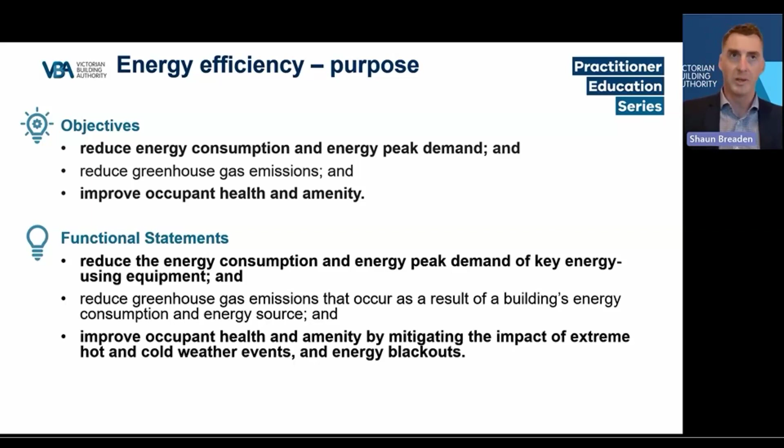Yes, these are not mandatory, so they're the non-mandatory part of the code, but it does give you a really good sense as to why the subject matter is important and why we're here discussing it today.

So if we look at NCC compliance, we've got the fundamental clause that tells you what NCC compliance actually is. A2G1, I like to call it my favourite clause in the NCC, says compliance with the NCC is achieved if you satisfy the governing requirements as well as the performance requirements.

In terms of energy efficiency, we have changes in both governing requirements and performance requirements. Governing requirements cover things like definitions, documentation referenced, state variations, and so on. Performance requirements are the compliance threshold we need to achieve through a DTS or a performance solution. Energy efficiency is no different - to get a compliant solution, we need to satisfy A2G1 and cover off our governing requirements and performance requirements.

So we'll jump in and have a closer look at the performance requirements and then how we're going to satisfy those by DTS and performance. But to start with, we'll look straight at the performance requirements and the changes.

Here we have the move from 2019 into 2022. In 2019, we had two performance requirements being building and services - the fabric of the building and the services associated with it. Moving into 2022, we've got thermal performance, which is very much the same concept as building, and energy usage, which again is similar to services, but with a different layer applied on top.

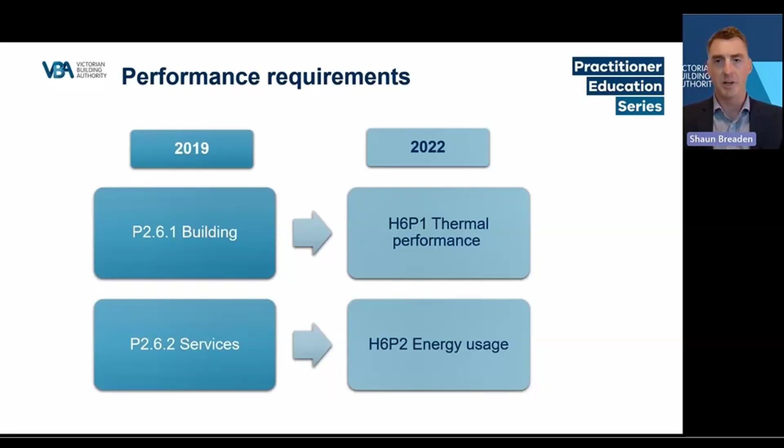The critical change from 2019 to 2022 is in how the performance requirements are worded or put together. In 2019 we were very qualitative, with phrases such as 'to the degree necessary' or 'appropriate to' - ones that were very open to interpretation and could be applied in numerous ways.

Moving into 2022, we get very much into a quantitative state. We see wording such as 'must not exceed', followed by a numerical value limit. So we're really firm on what compliance actually is through that performance requirement now.

Through the change, we've also had an emphasis on energy usage, which opens us up to the whole of home DTS pathway. The change to H6P2 allows for that introduction to whole of home, which we'll get to later. Here we have an example of one of the performance requirements, H6P1, thermal performance - the total heating load, total cooling load, or total energy load must not exceed the load limit specified in specification 44.

So that spec 44 gives a variety of things - how do we calculate what values the calculation is going to be, megajoules per metre squared, and talks about a variety of different terms, heating degree hour, cooling degree hour, and so on. But ultimately, they provide thermal loads.

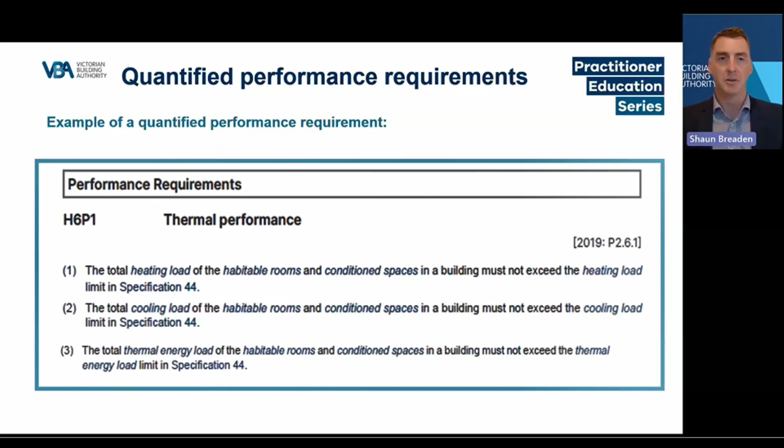Now, these aren't new - we've seen these through the NatHERS pathway previously for a number of years, but they're new in the sense that they've worked into the actual quantified performance requirements. So if we look at the two performance requirements, H6P1 and H6P2, they're quantified now.

So how do we satisfy them? We're all probably familiar with this diagram - we've seen it 1,000 times no doubt. Our performance requirements are satisfied either through a performance solution and/or a deemed-to-satisfy solution. So one or the other.

If we look at a performance solution, there's two ways to go about it. We can do a first principles approach, which is looking at that performance requirement in detail, calculating those loads, making sure it does not exceed what's limited there. Or we can do a comparison to DTS.

If we cross over into deemed to satisfy, the deemed to satisfy is a mechanism that says it's deemed to have met the performance requirement. So it's a mechanism that goes through.

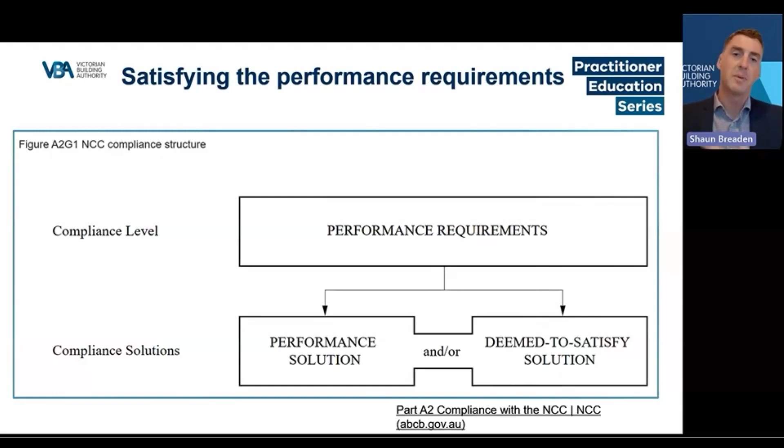So we get to our first question, fairly tough one in some cases: do I need to quantify the performance requirement in every situation, be that performance solution or DTS?

And the answer to that is no. We only need to do that quantifying through one particular performance solution pathway, being a first principles approach. So if you're going to do first principles and address the performance requirement as it's written, then you are going to need to quantify those values. But if you're doing a DTS or an equivalence to DTS performance solution, you're not going to need to quantify those values.

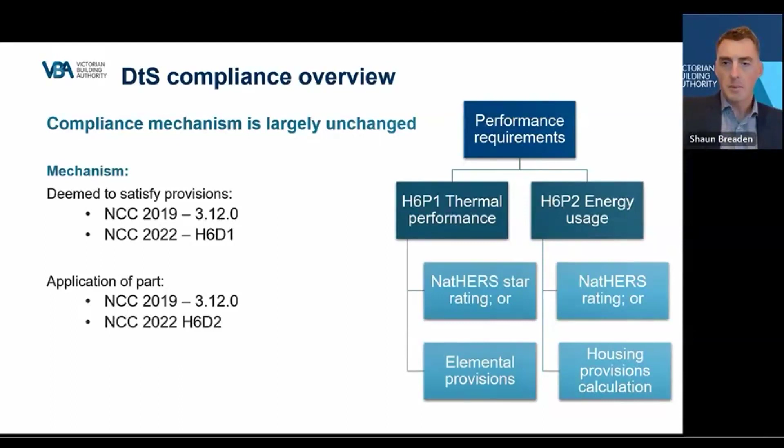If we look at the thermal performance requirement, H6P1, there are two options of how we're going to go about this. H6D2 explains exactly what's going to be needed in each case. We've got two options: a NatHERS star rating or elemental provisions. You only have to select one out of these two, not comply with both. But if you're looking to satisfy H6P1 and want to know what you actually need to do, H6D2 gives you the exact detail of what needs to be adhered to, what needs to be complied with to satisfy that performance requirement. So that is a really important clause within the NCC.

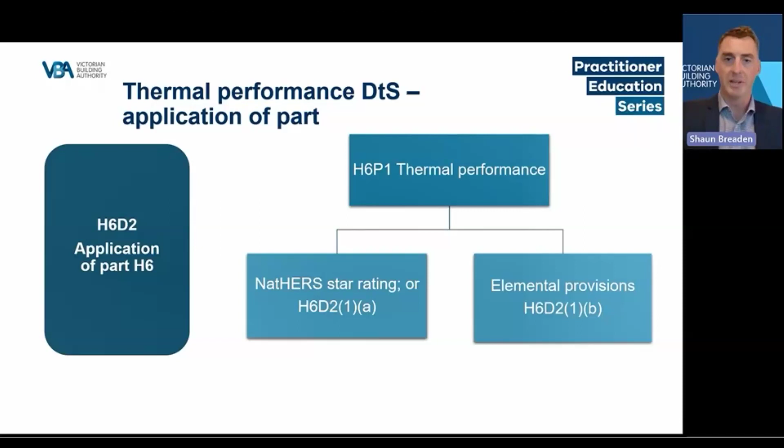If we go down the NatHERS pathway, compliance out of the code talks about compliance with Specification 42 using house energy rating software. House energy rating software is software that complies with the NatHERS scheme. If we dive further into Spec 42, that's where we start to see the increases in stringency that we've got. So we're going from a 6-star to a 7-star, as well as heating and cooling loads have been revised in the ABCB standard.

The stringency change, there is a lot of discussion around that and how industry actually gets to a standard or a place where that stringency change is easy. A lot of the feedback coming through is that the energy assessment needs to be considered as early as possible through the design process to enable good design. Then we're not up-speccing drastically and costing too much money, and all those kinds of questions that come in. But we'll talk about that later on in the Q&A session.

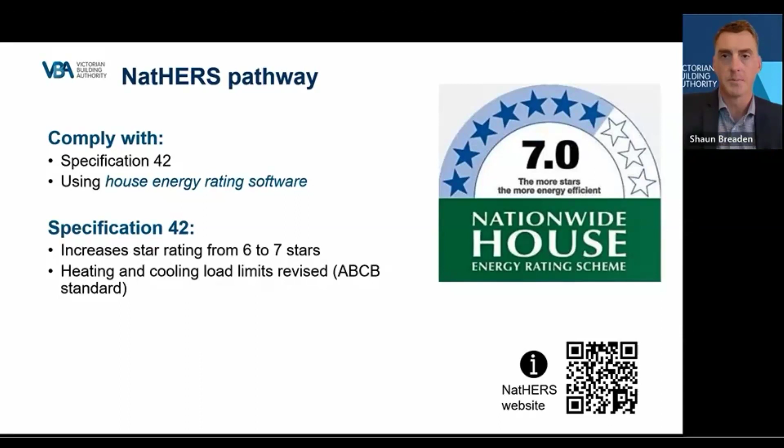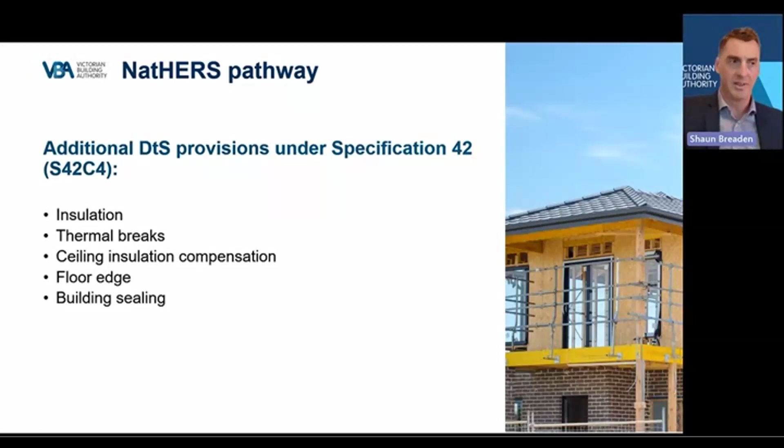Under Spec 42, there are additional requirements that need to be adhered to. We've got insulation, so the installation of insulation comes into that. We talk about thermal breaks, compensation for ceiling penetrations such as exhaust fans, downlights, floor edge, and building sealing comes into it. So your 7-star report is not going to be a cover-all. There's still a number of DTS clauses that have to be complied with on top of that report. But that hasn't really changed from 2019 through to 2022.

Now, the elemental pathway still exists. We've got the fundamentals of the building: our building fabric, our glazing, our building sealing. Probably the difference with the elemental pathway is that the elemental provisions have a far greater limitation in their scope compared to what they used to be in the past. There are situations where particular colours on an external wall for solar absorbance, or an eave overhang, or a wall height may mean that it's going to be outside the scope of the elemental pathway. Now, that doesn't push it into DTS or performance solution territory. It just potentially removes the ability for you to use the elemental pathway, and you can use the NatHERS pathway instead. But just be mindful that there are a lot of limitations in the use of the elemental.

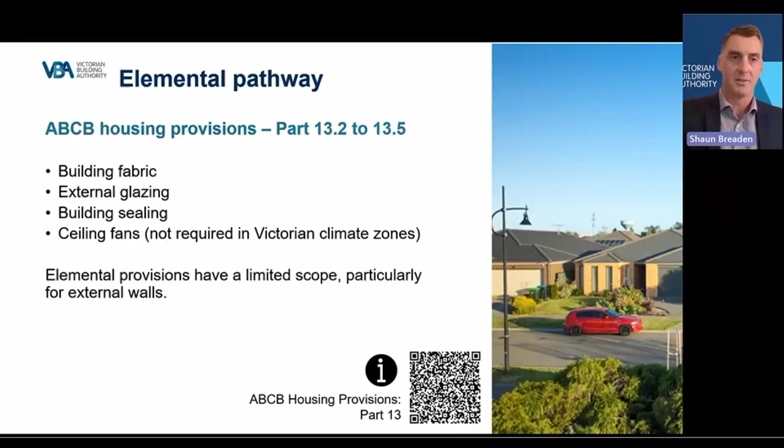Now, if we switch over and have a look at the second performance requirement, we've got H6P2 for energy usage. Again, H6D2, the application of part, is probably the most critical clause in Part H6 because it tells you exactly what needs to be complied with to satisfy the performance requirement. Here we have two different options of complying: a NatHERS rating, with its clause, and a manual calculation, with its clause and requirements too. So we've got the software and a manual process. But again, reiterate, H6D2, the application of part, is the fundamental key to make sure you satisfy your performance requirement.

So if we look at the new NatHERS pathway for energy usage, we've got compliance with Spec 42 and using house energy rating software or software accredited under the NatHERS scheme. When we go into Spec 42, we get the value of what we must achieve, which is a whole of home rating of not less than 60. On the right-hand side of the screen, you can see what that's actually going to look like on the report. In addition to this, you still need to comply with Part 13.7 for services, which is very similar to the 2019 NCC edition.

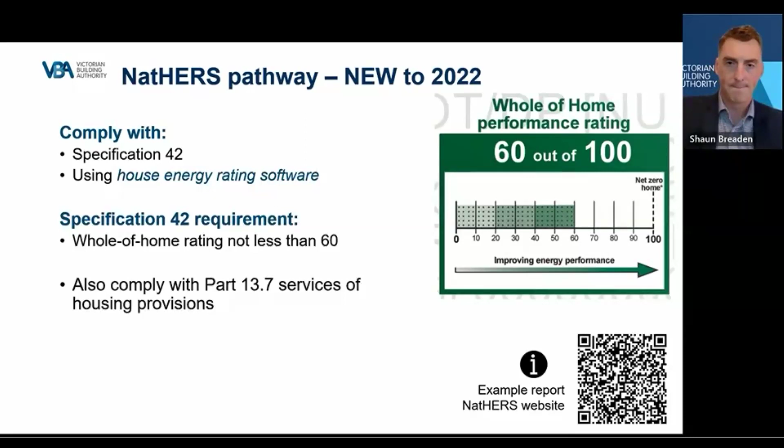The beauty of a NatHERS software calculation is it's got a broader calculation and broader parameters than the manual calculation. This diagram from NatHERS gives a really good indication of what it looks like. Firstly, we take into consideration the performance of the shell of the building, and then we go into our calculation looking at heating and cooling appliances, hot water, lighting, pool and spa equipment, and then offsetting by on-site generation such as solar PV. The manual calculation doesn't necessarily go into assessing the building's shell. This is what gives NatHERS the point of difference between the two. Now, important to note that yes, it does assess the thermal shell of the building, but that's just a base level calculation and process. It doesn't mean that these offset each other and vice versa.

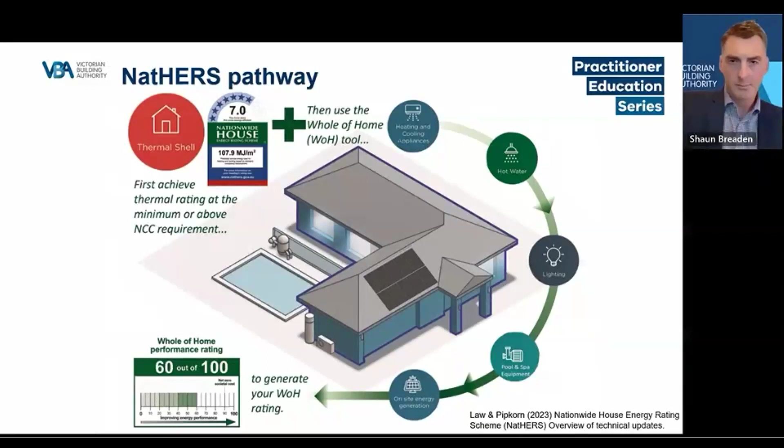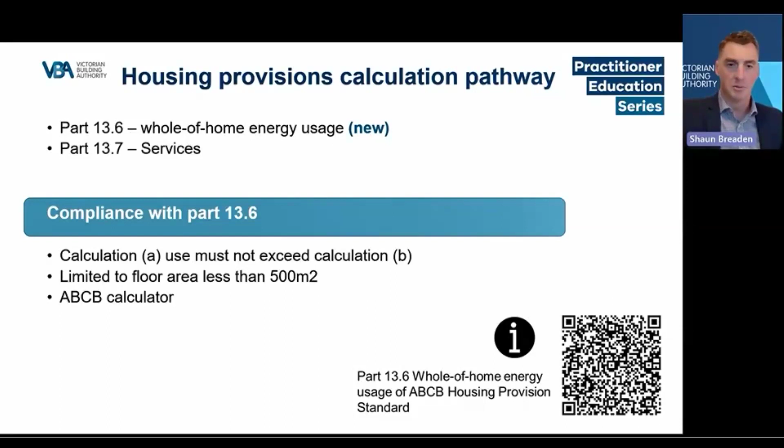So if we look at the manual calculation, we've got compliance with 13.6 for whole of home energy usage, and again we've got our 13.7 for services. Compliance with 13.6 talks about calculation A mustn't exceed calculation B. Calculation A talks about your floor area, heating, cooling equipment, and so on. Calculation B is your floor area and energy factors on top of that. So there's a really defined calculation through the code for that. The limitations are you can't use it on floor area that's greater than 500 square metres. And to make life easy, ABCB has put out a calculator that will do that calculation for you.

If you're looking to input the values, we've got numerous tables within Part 13.6 of the housing provisions, plus ABCB has a standard, the whole of home efficiency factors standard. Now that standard does offer a degree of flexibility, and you can see we've got an example here, so picking factors from the closest rating that could be chosen from the tables. If you're going to use that flexibility, the advice is to read the ABCB standard for whole of home efficiency factors in detail, and the front end of that talks about where you can and can't use that flexibility. But it is important to note there is a degree of flexibility built into that.

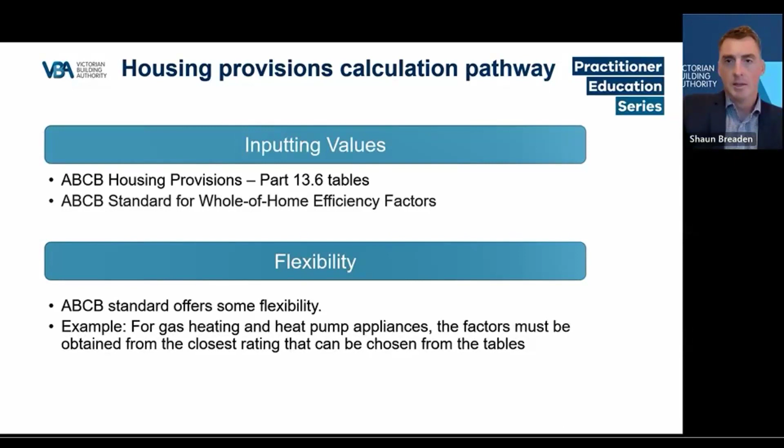So the next quick quiz: if NatHERS is used for thermal performance, is it mandatory to use NatHERS for energy usage? Thermal performance being H6P1, and energy usage being performance requirement H6P2.

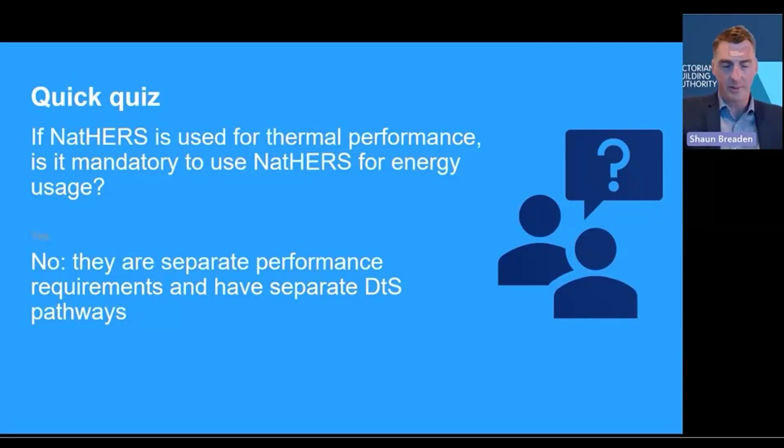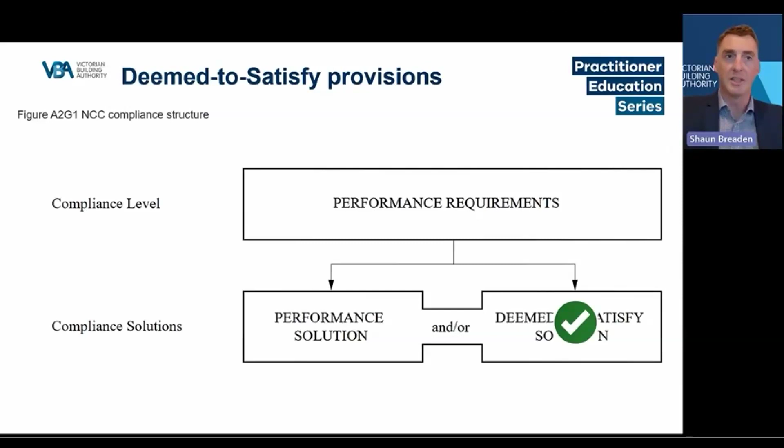And the answer is no. They're separate performance requirements and they have a separate DTS pathway, which we discussed under H6D2. So there's nothing that's going to mandate you using NatHERS for energy usage when you've done a NatHERS 7-star. You can still use a manual calculation if you choose to. Important to note that performance requirements are separate and they can be satisfied through their own mechanism, and that's the DTS that we're going to cover. Again, we've really just focused on how do we get that regulatory compliance rather than going into a lot of detail around different clauses that the ABCB did.

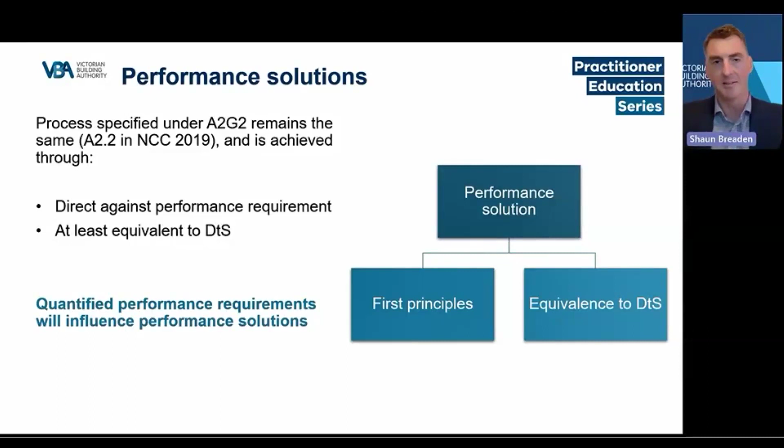So now we'll look at performance solutions. The performance solution pathway, again, has remained largely unchanged. We've got two different options for satisfying a performance solution: first principles, where we go directly against the performance requirement and assess it that way, or an equivalent to DTS. Your performance solution will be influenced by these quantified performance requirements, and the word is influence because it just depends on which pathway you take. If you're taking a first principles approach, the effect is rather great because you have to actually calculate the values. But if you're using an equivalence to DTS, you may not actually need to calculate the values, so it may remain somewhat the same.

A good rule of thumb when looking at performance solutions is that, in theory, your quantified performance requirements, your NatHERS DTS approach and your DTS elemental approach should generate consistent outcomes. They're not going to be absolutely identical, but they should be quite consistent and very close to each other.

So if you're assessing a performance solution and you see, for example, a heating and cooling load that seems ridiculously different to a NatHERS DTS approach, then you may need to ask questions and seek a peer review or the like. It doesn't necessarily mean it is compliant or not, but it gives you an avenue to explore that performance solution in greater detail.

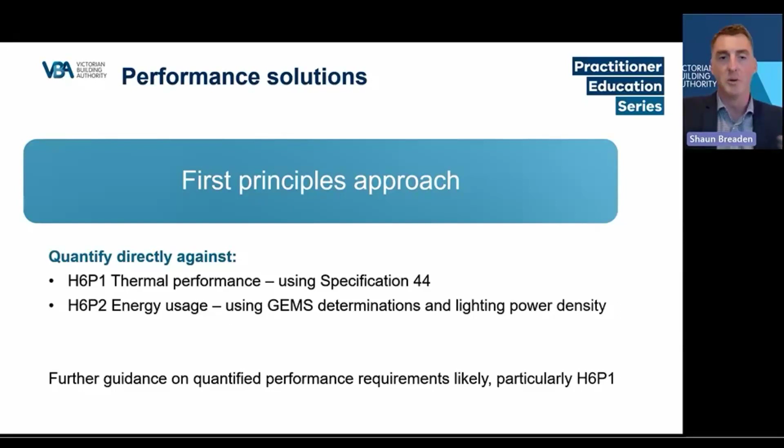The first principles approach - we've got H6P1 and a requirement through Spec 44, and H6P2 where we talk about GEMS determination and the like. There is going to be further guidance about how you quantify these in the future, but a first principles approach performance solution is not a common type of performance solution. So a lot of the guidance was focused on other things such as DTS and so on. But it's likely that there'll be more information coming available in the future.

Equivalence to DTS relies on calculations showing that equivalence, and there are multiple ways it can be achieved. Probably one way we've all seen and know in the past is your verification method. So verification using a reference building, or VURB, under H6V2, gives us a really robust process of how we can show equivalence to DTS. That process uses alternative software to NatHERS, and we're using DTS elemental provisions to calculate the thermal loads, and then comparing that through the reference process.

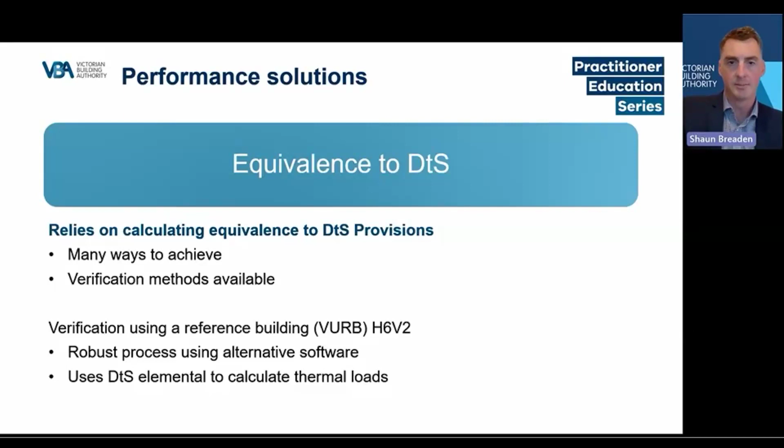A common question we get asked is about the limited DTS elemental provisions - can I still use the VURB, H6V2, in most situations? And the answer is yes, because H6V2 clarifies a process of establishing those heating and cooling loads. H6V2.3 has to be read really carefully because it sets out the parameters of what needs to be identical and what doesn't necessarily need to be identical. So if you're going to use it, read that clause really carefully.

So in most cases, you can still use the DTS elementals to establish your heating and cooling loads. It doesn't have to be identical to the proposed building, so it's still an option. But again, ensuring that you read that verification method in its full detail is important.

Always remember, any performance solution needs to be appropriately documented and really has to show how compliance is achieved. That's the important thing there.

Performance requirements can't be merged together - they have to be independently satisfied. An example is using PV under H6P2, where it belongs, energy usage, to offset a lower star rating under H6P1. That situation merges together two performance requirements, using H6P2 to offset H6P1. So if you merge them together, it's not going to achieve the actual required outcome.

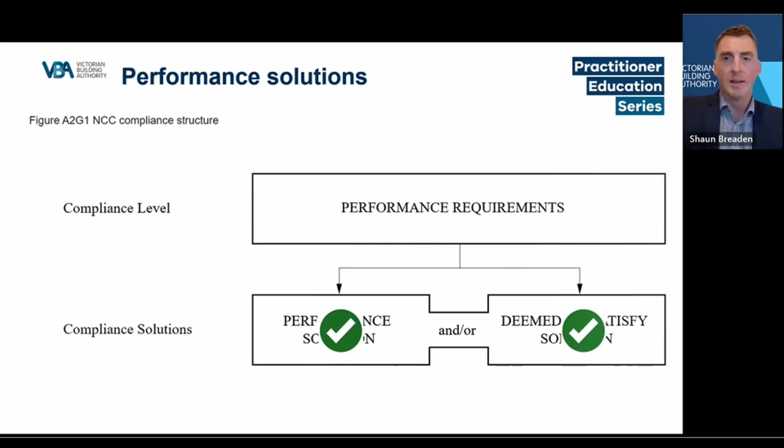And that's our performance solutions covered. We'll move into the governing requirements. One of the big changes in the governing requirements comes under the evidence of suitability part.

So we've got A5G9, NatHERS evidence of suitability, which states that a certificate must be issued in accordance with the NatHERS scheme. So if you're using evidence of suitability and you're going to rely on a certificate, that certificate has to be a NatHERS certificate issued in the scheme. So if you're using NatHERS, be it performance or DTS, that still applies if you've chosen that evidence of suitability pathway. Importantly, it is only applicable to NatHERS pathways.

So if you're using the VURB, which is going to be using different software, then you're not going to need a NatHERS certificate to go with that because it's different software.

Another question we get asked regularly is whether a NatHERS accredited assessor is required under the evidence of suitability change. And the answer is no, because the NatHERS rules for certificates are different to an assessor's accreditation process. If you are going to rely on a non-accredited assessor, there's probably more checks and balances that you need to go through to ensure that it is compliant. And the VBA's practice note EE03 can give you more details on that.

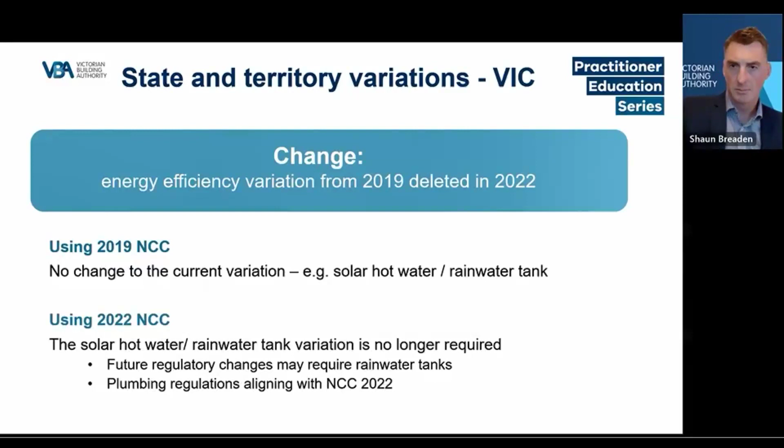Now we'll have a look at the transition from NCC 2019 through to NCC 2022. This was recently updated, so from 1st of May 2023, there's an optional uptake, so you can choose whether you want to use 2019 or 2022. From the 1st of May 2024, it becomes mandatory. That was originally 1st of October 2023, and it's been moved out 6 months to 1st of May 2024. Beyond 1st of May 2024, there's still scope to use the 2019 NCC in theory.

Section 10 of the Building Act applies in those circumstances. But the key date, really, is 1st of May 2024, when the energy efficiency provisions become mandatory outside of Section 10.

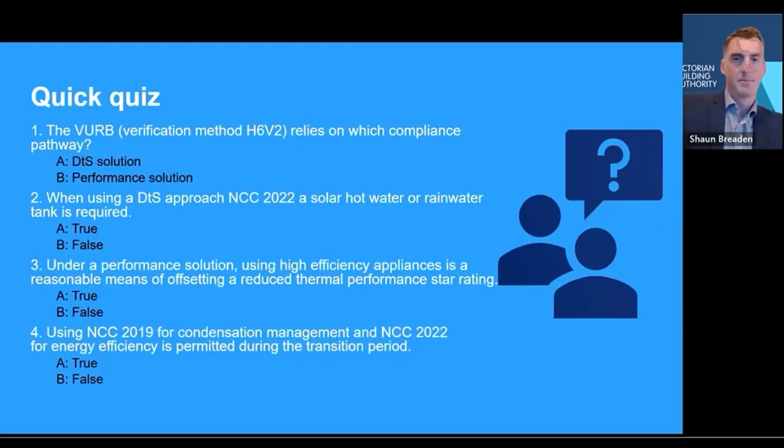Okay, if we run through these: the VURB relies on which compliance pathway? The verification method is a performance solution, so you still have all those things you need - performance-based design brief, etc. - for a performance solution with that verification method.

When using a DTS approach under NCC 2022, is a solar hot water or rainwater tank required? No, that variation has been deleted in the 2022 edition.

Under a performance solution, using high efficiency appliances is a reasonable means of offsetting a reduced thermal performance star rating. That's false, because high efficiency appliances form part of performance requirement H6P2 for energy usage, and thermal performance and star rating is H6P1, so they're two separate performance requirements.

And the last one: using 2019 for condensation management and 2022 for energy efficiency is permitted during the transition period. True, they're in separate parts of the NCC.

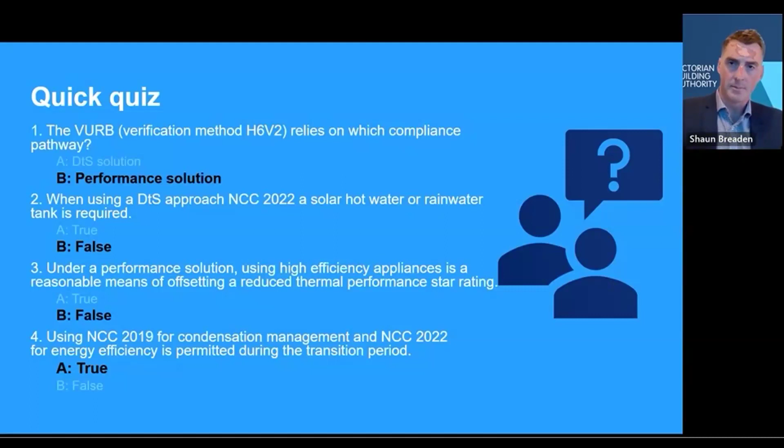Concluding, we've gone through and provided a broader overview of energy efficiency compliance within NCC 2022. We're really focused on that regulatory structure of it, not so much the finer details. What the regulator wants, what VBA wants, is for people to comply with the NCC more broadly. We've given you more insight into that, and we've covered off on Victorian specific changes. At the end of this, you should have a clear understanding of what energy efficiency compliance within NCC 2022 looks like.